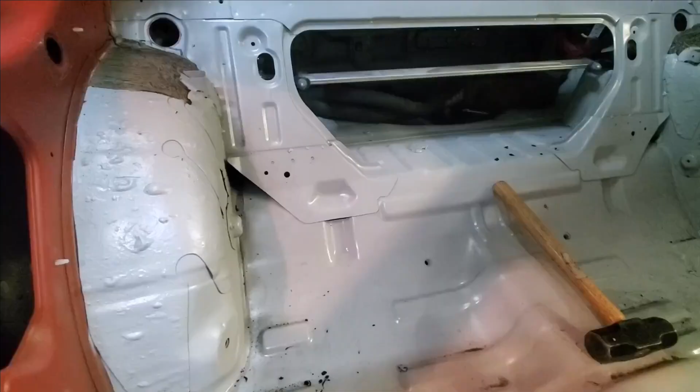So we're inside of an S13, and I thought I'd make a quick how-to on roll bars. This is going to have a weld-in 1 3/4 inch, 095 wall roll bar for a grip car. Obviously nothing's been started right now.

Step 1, find out where you want to place your roll bar. We're going to place this hoop, the main hoop, right here where these two flanges meet, where the floor meets this upright. If you notice, there's a bunch of spot welds, which is where there's some pseudo frame rail behind this. This is the rocker, so it's a very strong part of the car.

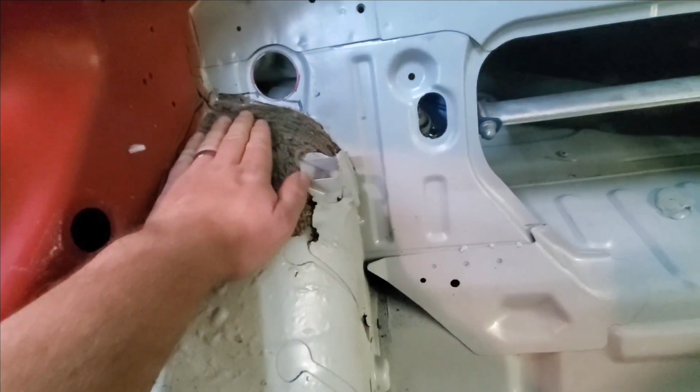The rear I'm going to do on top of the wheel well, but I'm going to tie it into the rear panel, using this flange and riding up on that a little bit. I'll plate that, and that's just going to go straight up behind me to where the roll bar connects to the main hoop. So step 1 is the boring stuff, which I've already done.

Scrape away all the seam sealer. Then you can see right there I've marked out what I need to grind on to get the paint prepped.

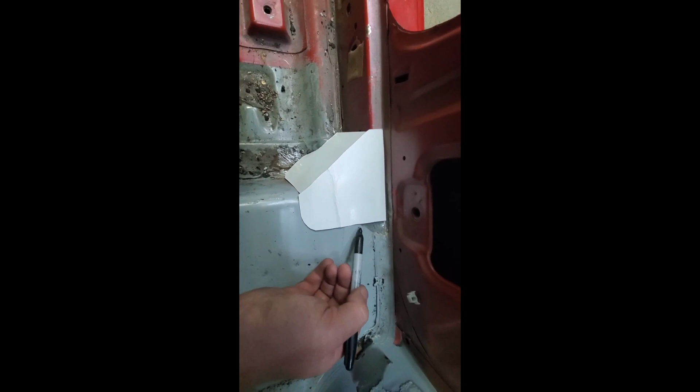Step 2 is to start with some cardstock and trace out, or develop, what you want as far as your boxes. Like I said before, I'm going to land it on top of the rocker panel, on top of this riser where the rear seat goes, and tie it into the 2 different sheet steels down here on the floor pan. So then you just make something that makes sense.

I'm going to just loosely trace this out, and this is going to give me all the different areas that I need to grind on, because I've got to get it really, really clean, or it's not going to weld very well. So just rough it out.

I use cardstock from Walmart, poster board from Walmart. It's like 13 cents a sheet, and it'll last a couple cages because you're only using a couple inches at a time.

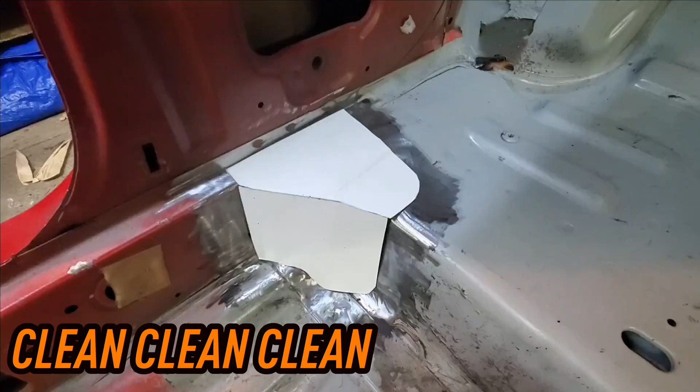Okay, all clean. Don't skip on this step. Clean, clean, clean—it's only going to make your job easier later. Also take a look at your rule book if you're building a cage to a certain spec, because sometimes they have minimum square inches. But quick tip, things that I use to get in there.

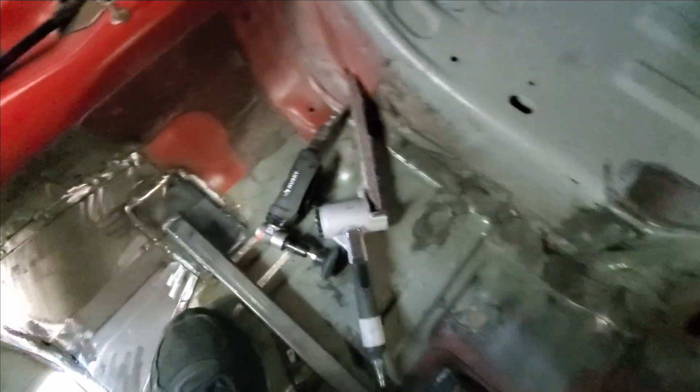All right, so I do the bulk of the paint removal and things with just a flapper wheel on a 4.5 inch angle sander. Typical whiz wheel stuff.

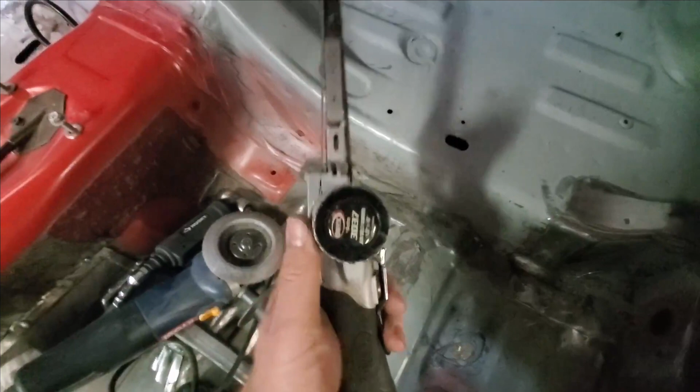And then the only thing that's a little bit unique that I have, that's not maybe your average guy's tool, is this 5/8 wide air belt sander. They're pretty cheap to get—I think this one came from Amazon. This really helps to get into really tight locations, just to peel out that last little bit of seam sealer. So not really focusing well, but anyway.

So the major bits are all done. Now it's time to start cutting the boxes.

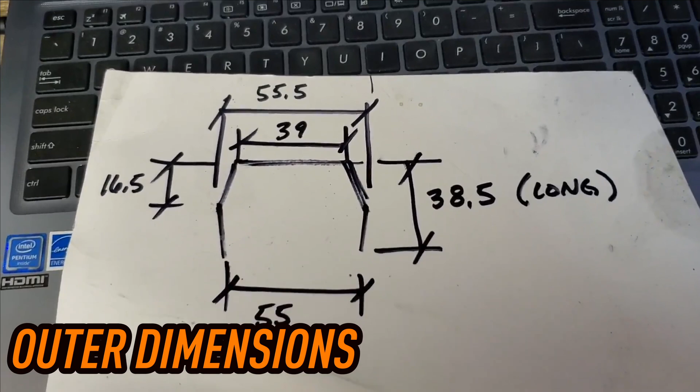Okay, so I ran out of plate for the boxes to finish those, so I'm going to move over to the main hoop. This right here is just a quick image of what the main hoop is obviously going to be—so it's just 4 bends, super simple.

I've gone ahead and measured the inside of the car on the outermost dimensions, and I usually—just one tip—I use this B-pillar total length. Keep it a little bit long, about a 1/2 inch too long.

It needs to be around 38 inches. So then I move over to BendTech Pro. I like BendTech.

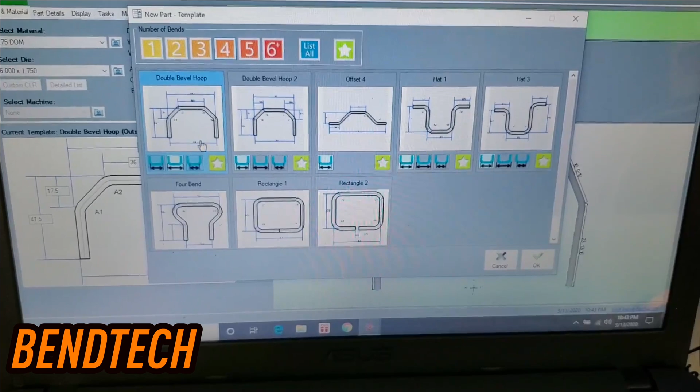Just in the first cage that I did, I probably paid for the program just in saved material. But moral of the story is, they have a couple templates.

So you select your template, how many bends you want. I'm measuring to the outermost, like I said. So I just hit OK.

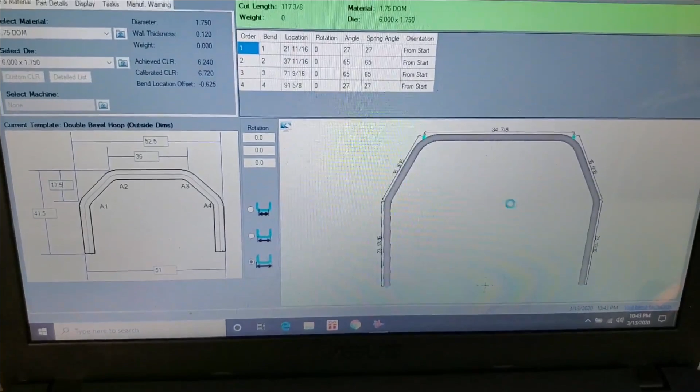This is from the last hoop that I did. And then quite easily, pick your material, 1 3/4, select the die. These are calibrated dies to what I have already got here. Everybody's will be slightly different.

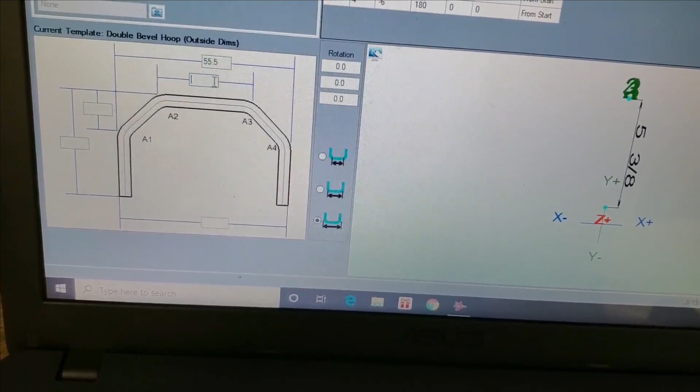And then just simply punch in the numbers. So 39, total height is 38.5, and the distance from the top down to the first bend is 16.5, and then finally 55.

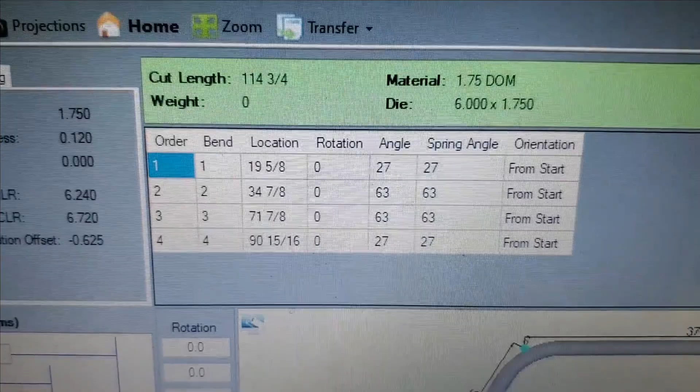Not too bad. Transferred my dimensions onto the tube. I'm getting into the habit now of fully marking the entire diameter of the tube. So anyway, that's where the bends will be.

So I've got my mark that I made where I want it on the die, and I preloaded. So now we're sitting right at 0. I think the first bend is 27 degrees.

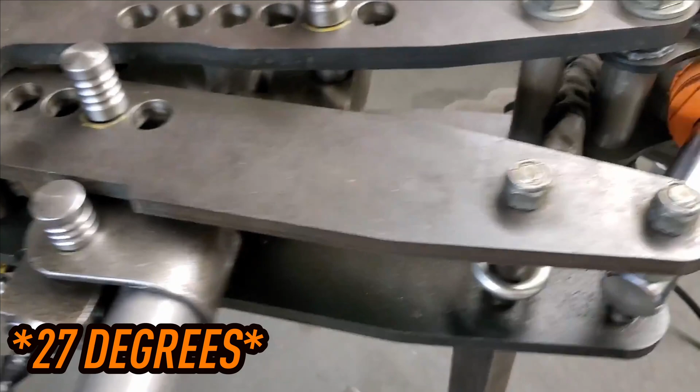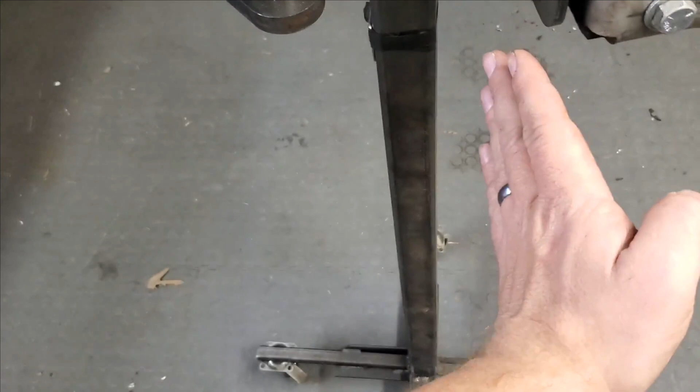I use an air over hydraulic system because it leaves me the ability to put it on casters. So when the tube is really long inside the shop, I can actually walk this thing around, and it's not fixed to the floor, so it makes it a lot nicer. So anyway, I'm gonna go ahead and bend this thing up.

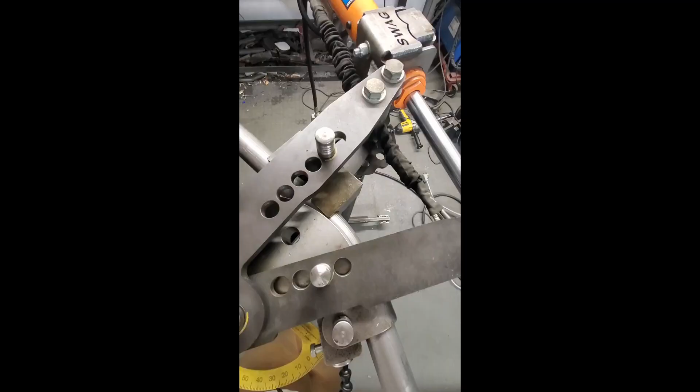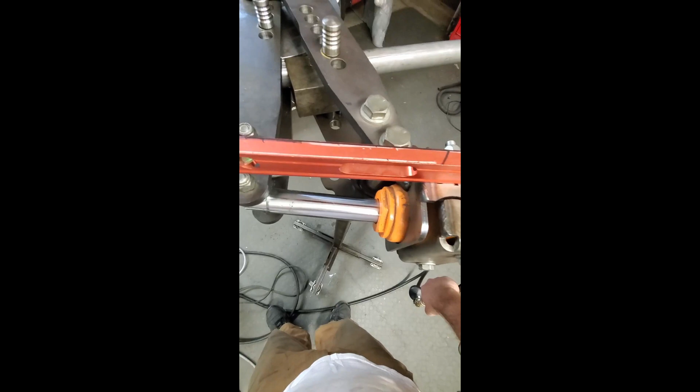Okay, first bend done. 27 degrees, right on it. Gotta go to 63 on this bend.

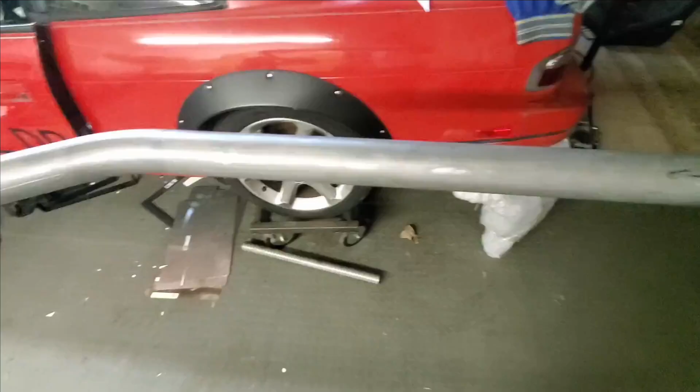Bingo, right there. So after you have your first 2 bends, now getting the roll is super critical. So what I do is I level out the die.

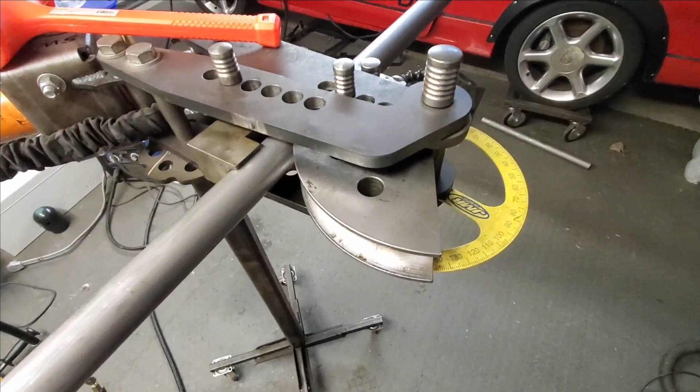So I'm on the line. I go over here, I place it, and I'm on the line. So again, super critical to be sure that after you do your first 2 bends, you pay attention about how much roll you have. It only takes a half a degree or a degree, and it will skew the entire main hoop.

Done. So it shouldn't fit the car, it should be a little bit tight. I made it a little bit wide and a little bit tall, so I don't mind squeezing them a little bit more if I need to.

Sometimes I've even creased them right in the middle, like on my wife's M, just to let it fit the roof line a little bit and squeeze the total dimensions in. So I'm going to go back and cross-check all my dimensions now, but hopefully next time you see it, it will be in the car.

Okay, so just as I expected, the roll bar is a little bit big, so by pinching in just very slightly, I'm actually able to get it to sit right inside the rockers. I'm going to end up cutting this, and when I put the plates in, I want to get more material.

It's not quite touching here, so I'm about 3/8 of an inch off here. I'm about a 1/2 inch off here. I'm touching on the roof, I'm touching on this side of the roof, I'm touching on this B-pillar, I'm touching down here on this B-pillar, and I'm touching back down here on the rocker.

So the only area that I need to do a little bit of work is I need to move this section towards the passenger just about a 1/2 inch, which I don't think is going to be an issue because right now the bar's being squeezed in, and I think maybe this bend here is doing a lot of the squeezing, right? It may not be uniform.

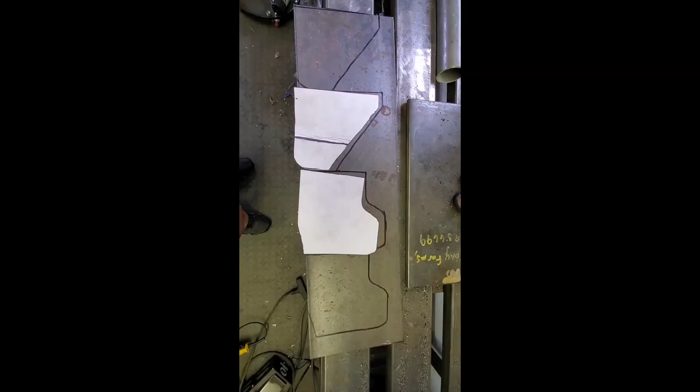So again, once I cut these, put the plates in, and move everything back out, I should be able to fill this gap in. So pretty happy with the results so far. All right, transfer your patterns onto your plate and go ahead and cut them out.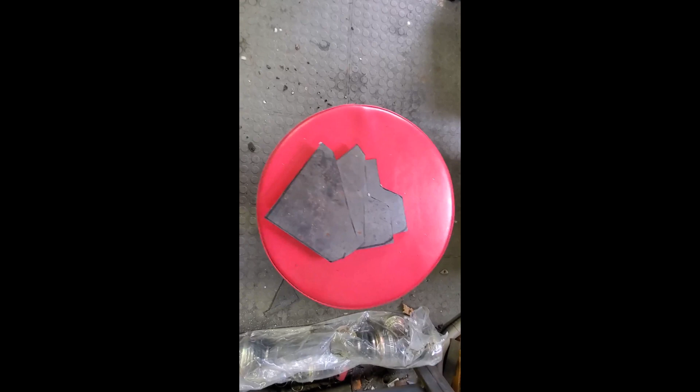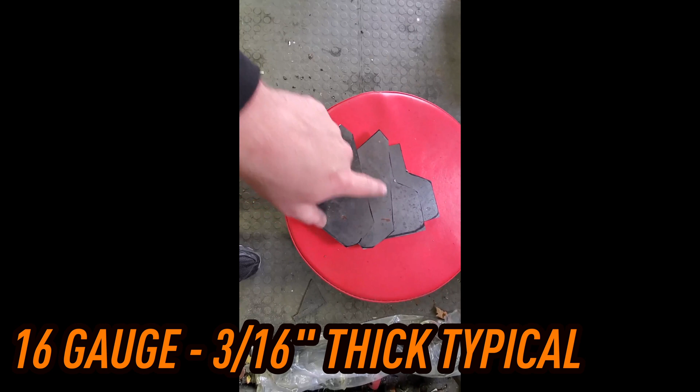Okay, plates are roughed in. Just remember, when you put the template on, you got to cut the line out because you're drawing on the outside of the template. So I leave just a little bit of marker left, and then I'll shape up areas like this with the sander because the bandsaw is just too big to get into that.

Okay, plates are done. I just got to do some creases in this plate here to match the contours of the chassis. So I'll do that next, and then we should be able to tack them in.

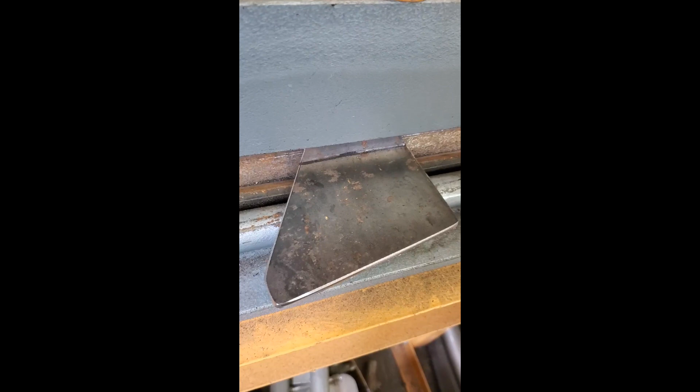Just putting a little bend in it to contour to the chassis. Doesn't need much. Okay, after you tack the plates in position inside the car, I bring it outside the car real quick and do a full weld on the plate seams so I can set it right back.

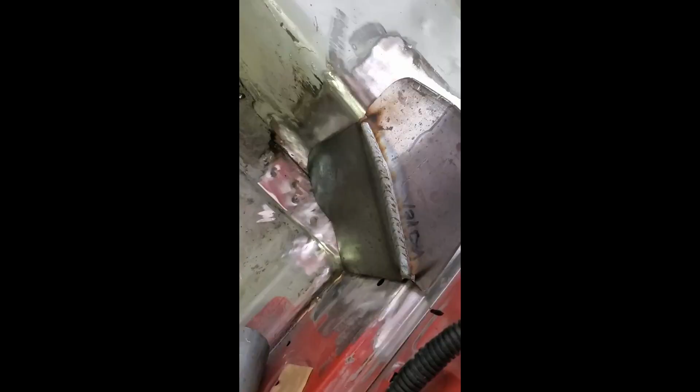So here's the plate put back into the car. I just position it back like I had it. And this is what the roll bar is going to rest on. So a nice flat section, then a little bit of a taper to contour to the body. And then I'll weld all the way around this once the roll bar is installed.

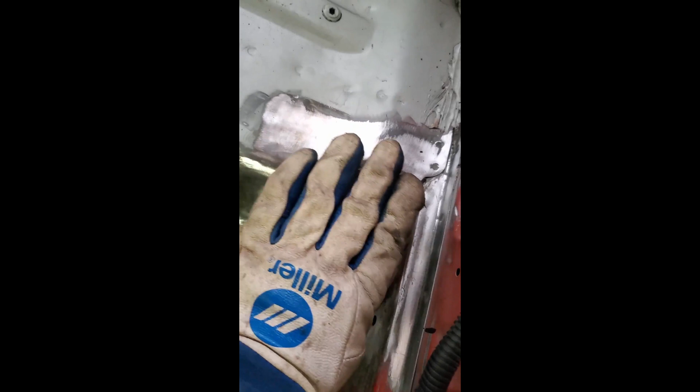On this roll bar, I do have to take these back out and let the roll bar drop to weld the top. Some cars I'll weld this out completely right now. Other cars, depending on the design and features, you've got to make the decision pretty early on how you're going to weld the top of the hoop. So it's super critical, but this is the first one, and now I'm going to move to the passenger side.

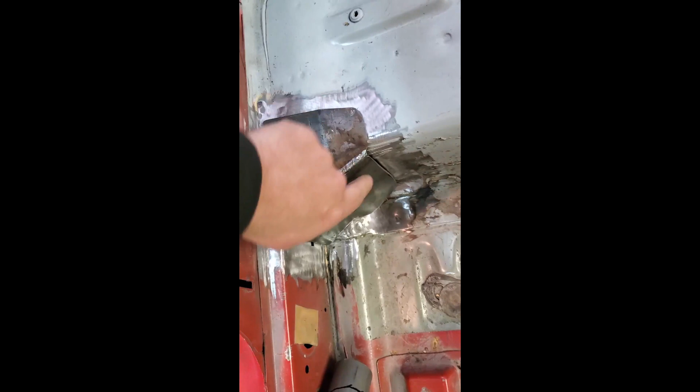Okay, here's side number 2. So next we're going to burn out the seam sealer that's around the edges of where this is going to be welded.

Okay, I just got the roll bar main hoop to the right length on the legs, so it's fitting a lot tighter up here. Still on the roof, still touching down here at the B pillar, and still touching everything. So I've got to shift my plates around just a little bit to get my gaps consistent and nice and even. But we're about ready to move on to the rear stays.

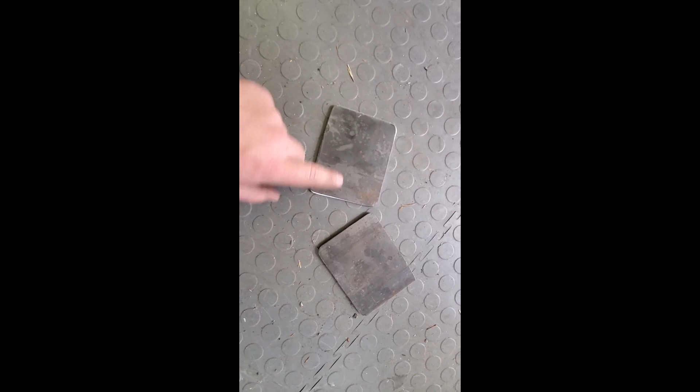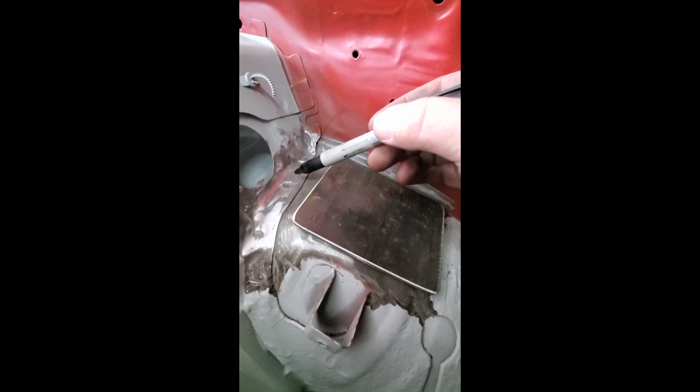Quickly cut out some rear stays, so these will go in the back. We'll put a little bend into it to match the wheel well, and should be good. These will go ahead and tack down because obviously they don't need to be removed to drop the cage for welding. So back here I want to adhere it to this plate as well as the wheel well.

So I'm going to come up like this. I'm going to probably put a crease right here, and then followed by a crease back here, followed by a crease back here, and maybe another one at the very end where it starts to dive off.

And some of these won't be exactly parallel. If you notice, I drew it deeper here than here, so this one may end up being a slight angle towards that rear corner, like that. This just takes a little bit of practice, but I'm going to end up curving this and then doing a mirror image of that for the passenger side. So yeah, but back here, everything looks pretty good.

Okay, first plate welded in. Now just to replicate the same thing on the other side.

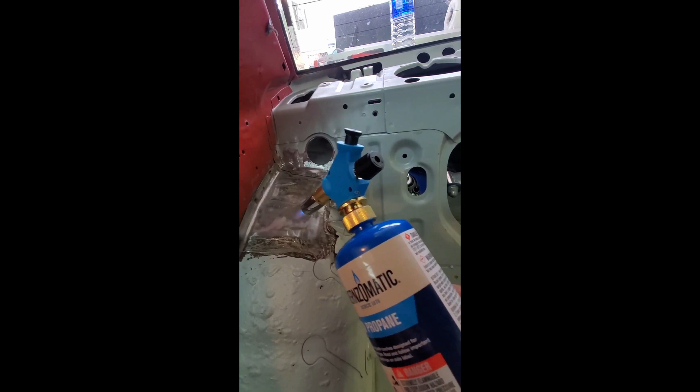Okay, got the first rear stay done. Marked it to make it easy.

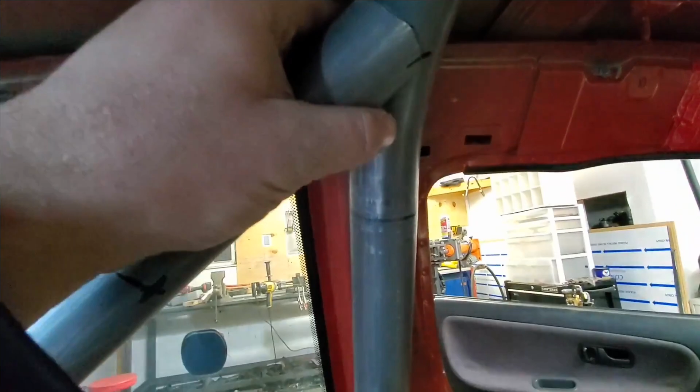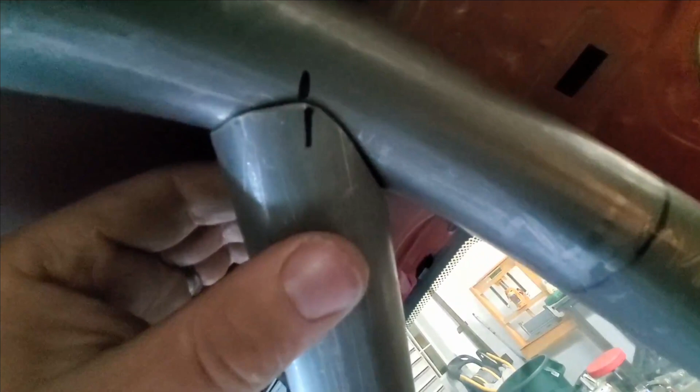Typically you want to go as high as possible on the main hoop. Remember, you're gonna have to weld back up here, but we're gonna drop the hoop to do that. I just cope it. Let me push that back where it's supposed to be, right there. And then down here, I want to leave myself just enough room on the back side to get the MIG gun back here to do a nice bead.

I like landing this on top of the wheel well for a couple reasons. We talked about the doubling of material here. It also ties into the inner sheet steel of the quarter panel. But along with that, other good things just from a geometry perspective, this angle here is almost like a 45-degree angle versus your classic 30-degree, which would land you here. So this has a lot more strength from a geometry perspective.

Sometimes I'll land them back here on the frame rail. But this time, honestly, I thought it would just make more sense to go up high, giving you tons of room back here. I don't know if you ever want to stack tires or put tools, whatever you need to do that keeps the bars out of the way when you set it up like that. So anyway, that's number one, and then I'll show you guys what I did for the second one.

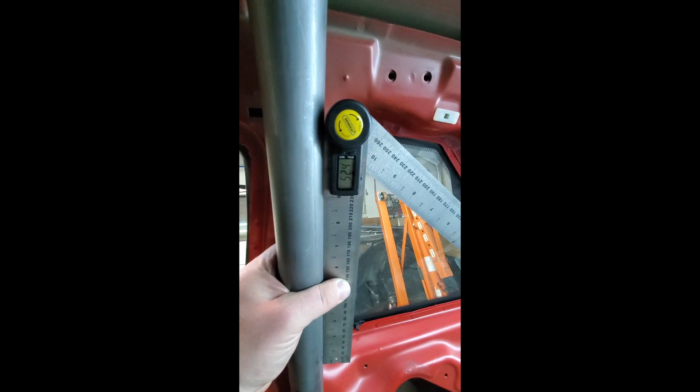Okay, it's a little hard to do this one-handed, but I've got my digital protractor here. I'm basically using experience to tell me where that's going to be and where it's going to land based upon that angle. As you can see, it says 52.4 degrees.

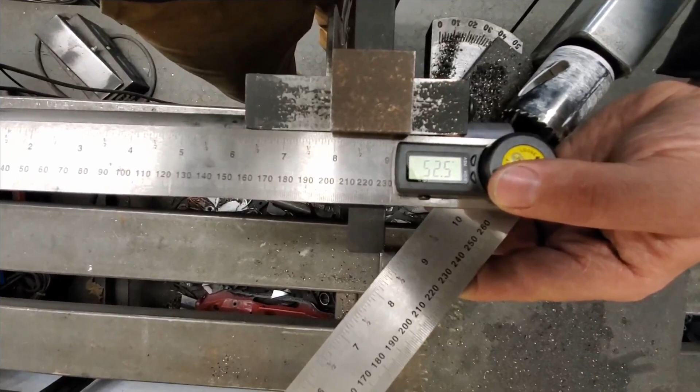So when I go to the notcher, you're going to do the inverse of that. This is where it's very easy to get screwed up. Because we're looking at this in chunks of 90, the angle we measured was 52.4, 52.5. So if you lay that up against the notcher, the inverse of that is going to be 38 degrees. That gives you the 90, so we're going to notch at 38, not at 52.

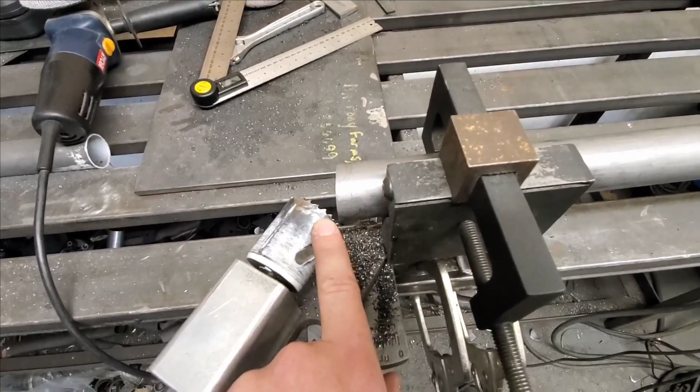The notcher's got a 1 3/4 inch hole saw, so just pretend this is the main hoop it's going to pass through. It's got a bearing block, a shaft, and then a DeWalt drill. Very, very simple.

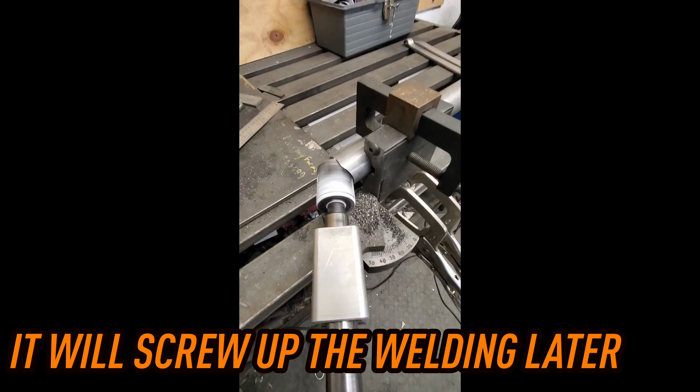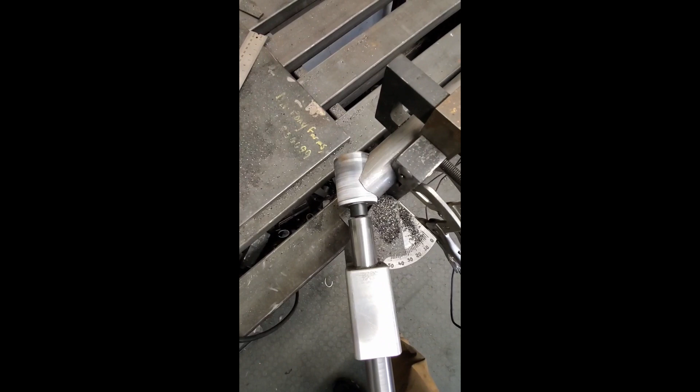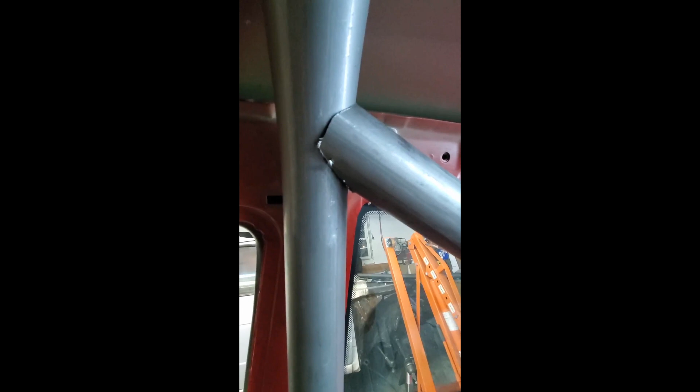So here's our uncleaned first pass cut. Not so bad. It's got a little gap in the bottom, which is perfect, because down here I've got to move it from inside this hole onto the plate.

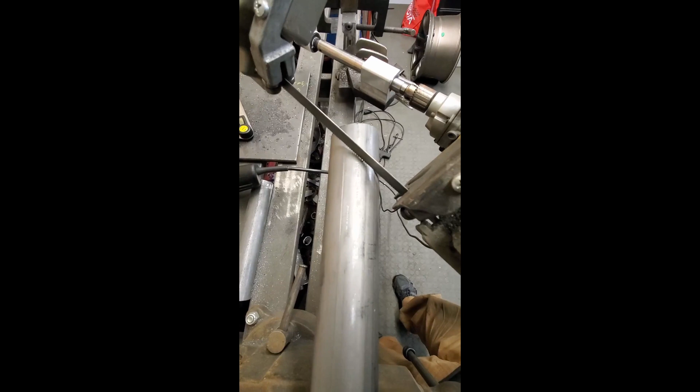So this is after the first notch and the first cut, and I made a little mark. I'm going to take about another 1/4 inch off or so, and then this one should be good to go.

I'll clean it up, and we're ready to weld it. And done. So all notched, ready to go. Two cuts and a little bit of sanding.

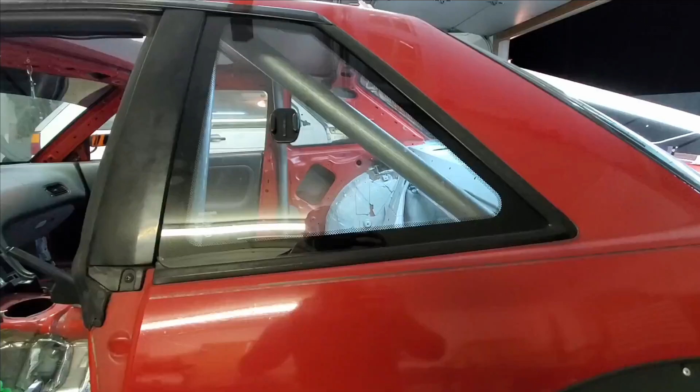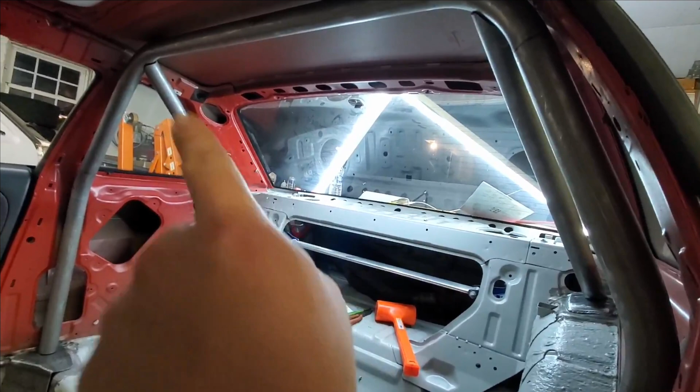Nice and clean. Okay, before you give everything a tack and start the welding, step out of the car, make sure you look at both bars together to make sure they align and one isn't askew from the other. This part is very, very visual. You can do a lot of measuring and things and might be able to get it, but quite frankly, I've had the best luck just by stepping out of the car, looking at it for a second before we weld it. So up next, we're going to weld up here and here before dropping the hoop.

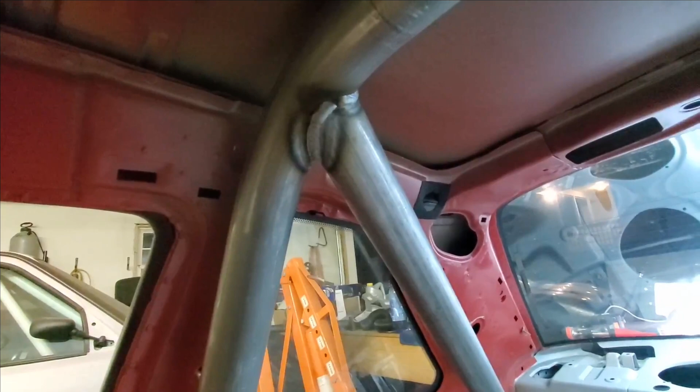Okay, so just welded the bottoms and around the tops of each as much as I could before dropping it. The light's kind of crappy in here. Quick tip: if you're out of position like this, try to cut the tube into quarters and just deal with 90 degrees of the tube at a time. Sometimes even different sides are easier if you're left-handed or right-handed. You're always going to be out of position when you're welding a roll cage, so it's something you'll just have to get used to.

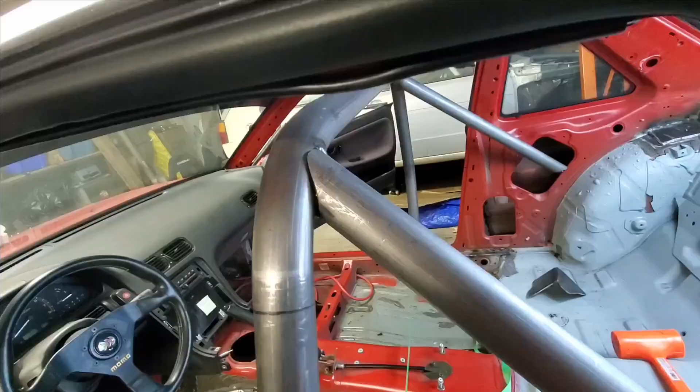All right, hoop is dropped. I'm going to weld on top of here, likewise on the other side over there, and shove it back in the car. All right, here it is, dropped and welded. So I'm going to shove it back in the car now. Okay, so it's pushed back into place.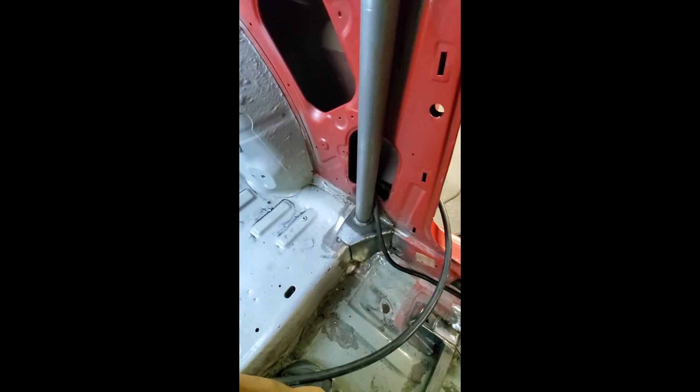I've welded all 4 locations completely now. I had to use both hands and couldn't film much of anything, but I did want to go through a couple tips that help. Number 1, you can see back here, I put a tack, and then when I ran the weld, it kind of made it look a little more fragile. So the less you tack, the better off you're going to be on the look of the welds. It doesn't really affect anything but the look.

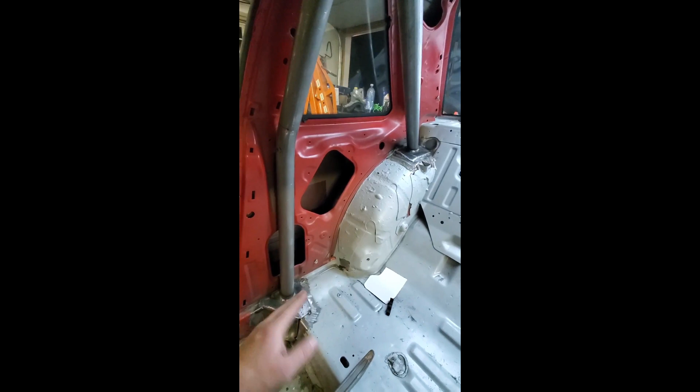Just wanted to offer that up if you don't already know. Another point is when you weld the tops and drop it back in place, the metals are going to draw in or out, so you might have to physically push. You can take your leg and push it a lot of times just to flex it a little bit more to get it in the position you want. If it's too close, sometimes you'll take a bar and pinch it out using the seam of the car. So again, just a couple tips to get the final position right where you want it before you glue it together.

So I just finished welding in the boxes. It didn't go too bad.

Heating the metal up before burning off most of the seam sealer and cleaning it really well goes a long ways. If you run into issues with the seam sealer and things like that, just run more gas flow. A lot of times that will help, just clean really well and not suck in a bunch of nitrogen.

I'm not really a start-stop guy, so most of these welds all the way through here are just continuous. I don't like to squirt so much. Sometimes you have to on really thin metal if your welder won't go down low enough, but for me, I try to get the welder set so I can just continuously keep on keeping on. Weld gaps and things like that also impact how well you're able to do that.

So next we're going to do the diagonal bar for the main hoop. This is kind of a spec requirement. I put the seat temporarily, fitted it back in so I can figure out where to land this tube. I think I'm going to land it somewhere in this vicinity because I want this seat recess in the most rear position as much as possible and be as safe as possible, giving the driver as much clearance for their head. So something about right here down to there.

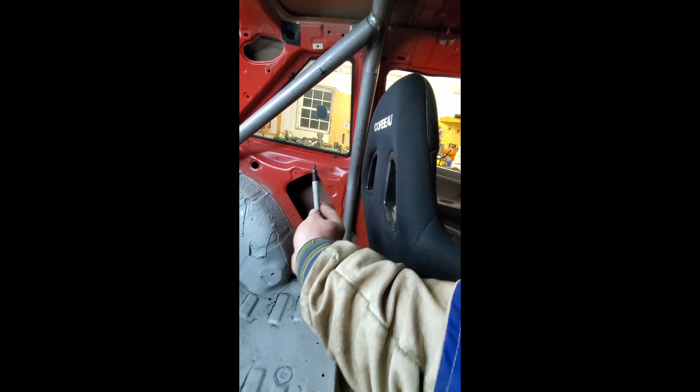Along with that, I'm going to start planning the driver's side harness bar. I believe I'm going to have a harness bar that comes out a little bit and snaps back into the diagonal I'm going to install first. Then on the passenger side, since it'll be a fixed seat that's a little bit lower, I'll figure out what's best to do over there. I may be able to get away with a straight bar, but it doesn't give you a whole lot of strap adjustment. So I'll just put the sliders and everything on and go in the rearmost position and see how it looks.

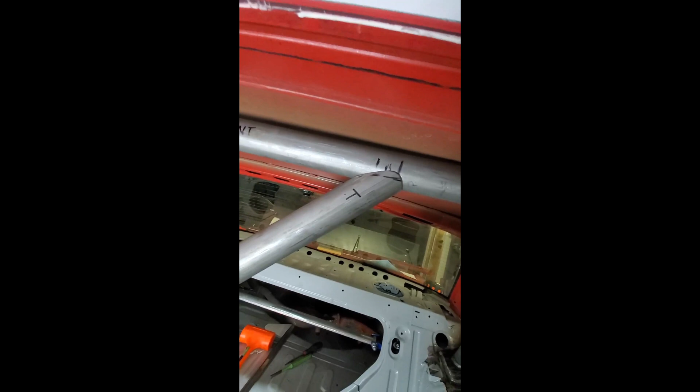Next, I'm installing the diagonal. Went ahead and notched it and cut it and everything. Again, I didn't film any of it because it's nothing I haven't already shown you. But that's the fit up top and down there. If you can see that, it should be pretty good. So tack this in and then work on the plan for the harness bar.

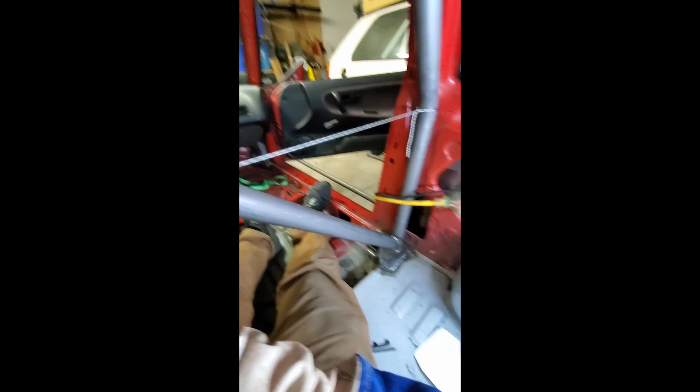The remaining two tubes of this roll bar are the harness bars for the driver and corresponding passenger. The diagonal bar, I went ahead and welded that in up there and down here, so that's fixed, it's not going to go anywhere. I used a piece of yarn, got it super tight, and aligned it with the chassis, making sure each side was the same. That's going to tell me where the top of the tube needs to be in the middle of the car.

So all good things. I decided to make one bar go all the way from the driver's side B-pillar to the passenger side B-pillar. I'm just going to bend the end of this tube at 45 degrees on each side, and then I'll cut and splice where I need for the B-pillar.

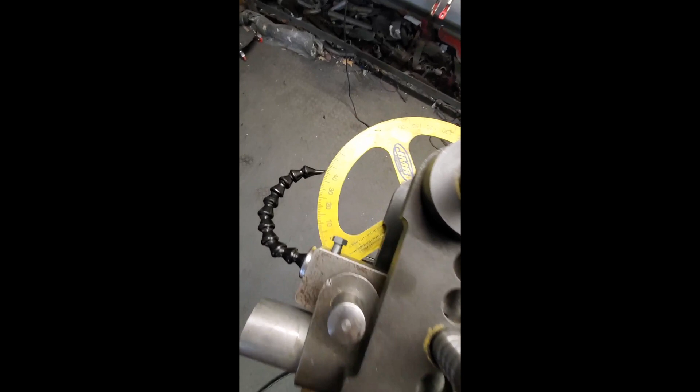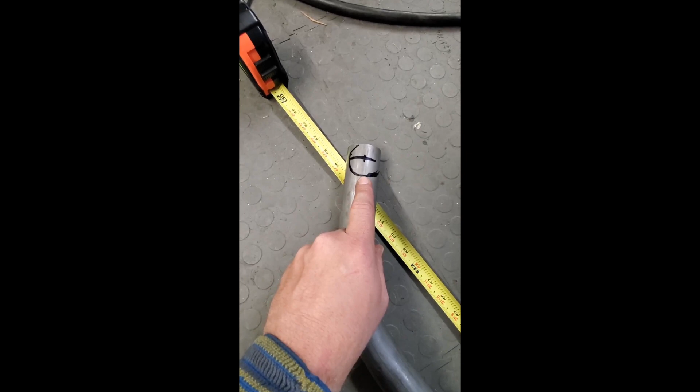This is one of those measure twice, cut once scenarios. I know the total length between the two B-pillars of the cage, and I'm basically trying to center this bent bar between those B-pillars. What happens is when you cut into this further, you also shrink the tube. If this was like a 90, you can cut this, as long as you're 90 and the outside dimension's correct, you're good to go. But because this is a 45, it's very sensitive to any cuts you make on the inside, so you have to be very careful and slowly get up to this line. Not just punch a hole and do the same on the other side, and find out you're a quarter inch too short—there's nothing you can do about it, you can't straighten the bar back out.

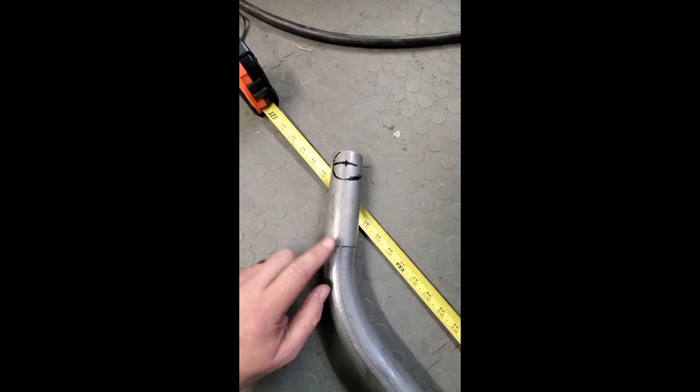All right, well, the harness bar has been added, and that pretty much wraps up this roll bar. So, a couple final thoughts: if you're doing this by yourself, there's a couple ways to get the material.

You could go to Roll Cage Components here in Virginia and get a kit. I don't know what his kit looks like - obviously you watched me bend all these as a custom piece for this car. But I know you can get a kit, and this guide might help you put your own kit in. You could use the guide too to develop your own roll bar, and you can take the things that you like or don't like out of this one and apply it.

Number two, I think - don't try to do this by yourself if you can help it. Having a second set of hands will go a long ways. I've kind of worked by myself, so I've got a lot of tricks just to handle that aspect, but working with someone else would be a lot more efficient.

But other than that, I think all in all it turned out pretty well. We're right on the roof here, we're touching all the way down the B-pillar on this side. Let's see, the harness bar is recessed back 3 and a bit inches. I'm going to slide the seat in here in a minute and take a look at that. Most of the welding came out looking pretty nice, especially for some overhead stuff. So other than that, I think again, not so bad.

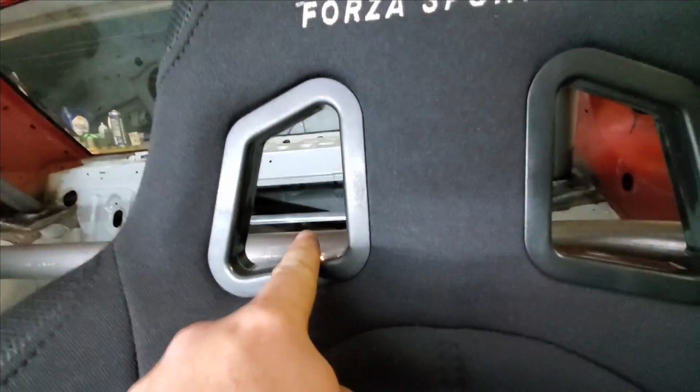When you set your seats in, you can sort of see where that harness bar is, but there is a certain amount of angle that you're allowed to have on your straps for your seats. So if you take a look at the driver, you can see the harness bar is fairly straight. What you don't want to do is have the strap pass through and tuck down to the floor - if you get in an accident, you compress your spine. So the reason this rule exists is because from 0 to, I think, 15 or 20 degrees from your shoulder down, that harness bar has to make contact with the straps.

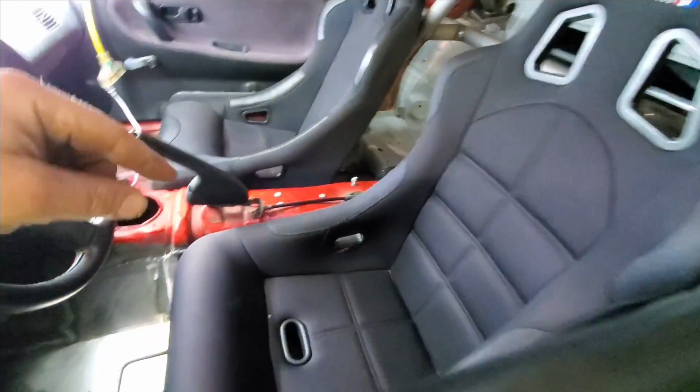So you can kind of see from a driver and passenger perspective, it's basically the same. Seats came in roughly the same height. The driver, I completely cut out the floor of this car, and as you can see, added a little extension to the seat rail because this is now on sliders. So it kind of elevated everything back up and unfortunately mimicked the passenger a little bit. But anyway, on the driver side, I cut this cross beam out, used 1-inch square tubing, remade a frame, and then bolted this as low as possible. Then of course it got stacked up by another inch or so just because of the sliders, but hopefully that means the driver won't be hitting their head, and they get an adjustable seat.

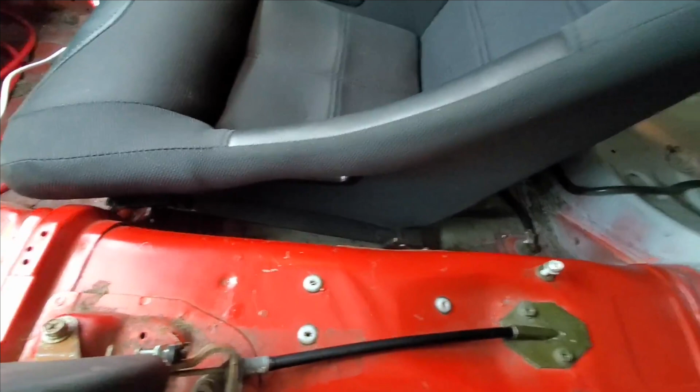On the passenger side, this seat was bottom mount only, so I had to make a bracket that bolts into somewhat of the OE location, but it sat really low, so I ended up cutting sections of the front out and things like that. It's a little difficult to see now that it's bolted in, but anyway, it's a bottom mount only seat, so this flat bar bracket bolts into the bottom of the seat, then the seat bracket bolts into the car. Again, nothing too crazy there.